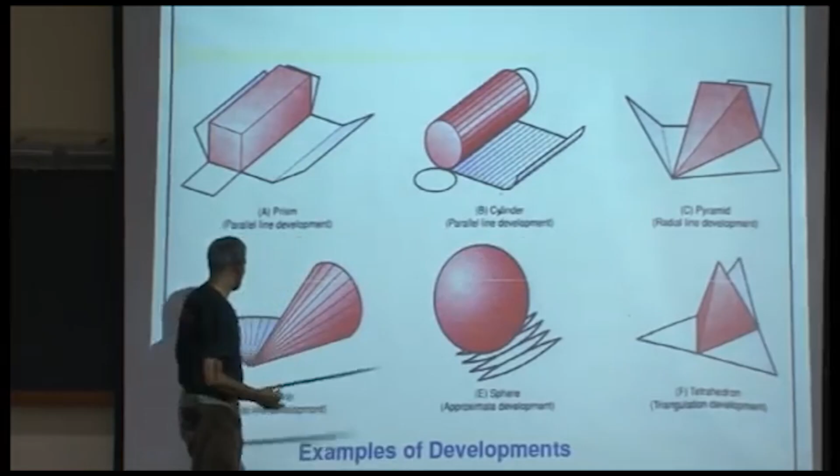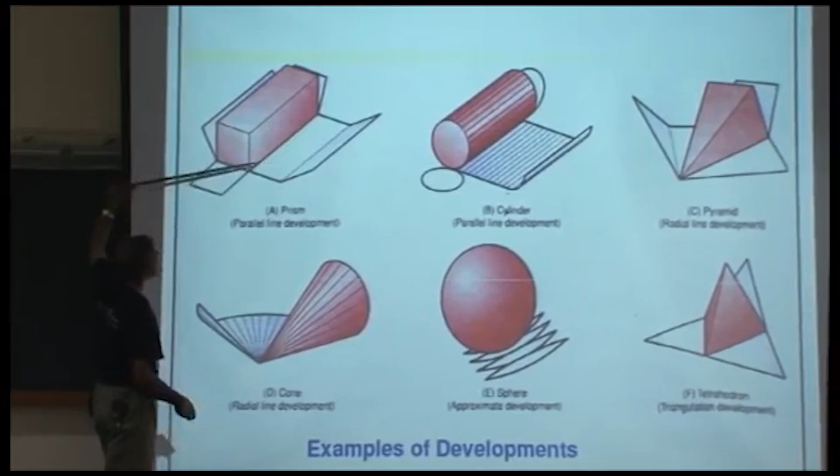So what you see is a box or a block, a cylinder, a pyramid, a cone, a sphere, and well, this is a tetrahedron. This is pretty much like a pyramid. Okay, and what you also see is that they may have been made by paper. And how would you want to unfold the paper so that you can lay it down flat on a plane? So perhaps you can cut one of the edges. You can make one cut over here, another cut over here, open up and lay it down on a plane, and once you fold them back, you would get this cuboid, for example.

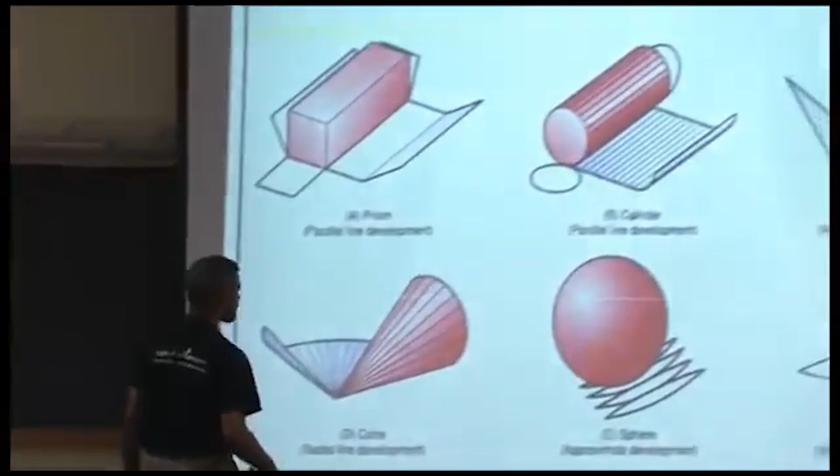Same thing with the cylinder. So cut this face apart, and make a cut along this direction, lay it down. So essentially the idea is that all of these solids, except for perhaps the sphere, have been made by a single piece of paper. And the question again is, how would you want to prepare that piece of paper so that you can get the solids back? All right, so this is quite straightforward. The unfolding is quite straightforward.

So the method is the parallel line development: cut and lay it open. Parallel line development; this is pretty much like a radial line development, for example, when you cut the pyramid, you open up, so to speak, a sector. Not a rectangular piece of paper, but a sector. Same goes with the cone, and with the tetrahedron, you open up this piece of paper into triangles.

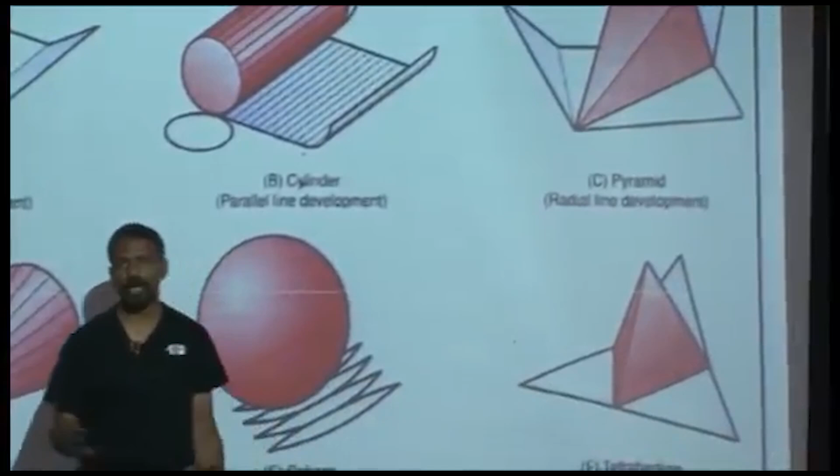So just an example. Examples 1, 2, 3, 4, and 6 happen to be examples where you prepare your piece of paper in such a way that you get the exact solid back. This one is like an approximate example. We'll talk about that. So certain developments are exact, certain developments are approximate. Except for this example, all the other developments are exact. This one is approximate, and this point seems to be important.

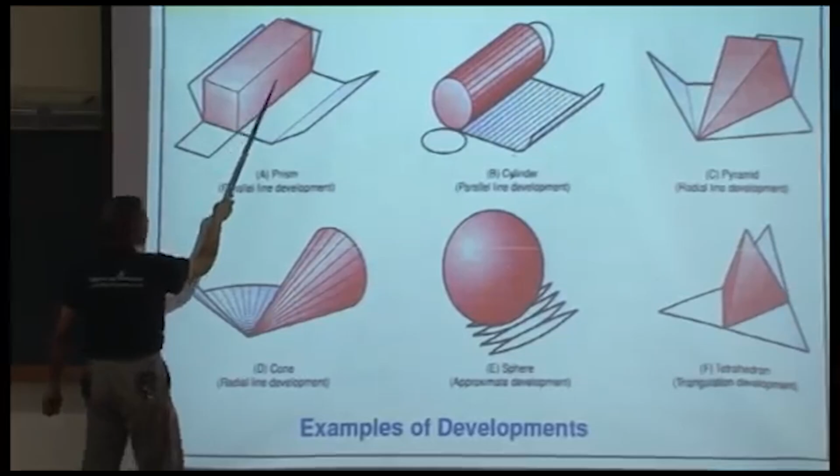So for example, if you have a little void here on the surface, or a void here, or any feature, when you are opening up that corresponding piece of paper, what do you expect? Should the feature be in true dimensions, or in some sort of untrue dimensions, or projected dimensions? What do you expect? True dimensions? Everybody? This is what the intent is. All features on these surfaces have to be in the true dimension, and that is the point you have to keep in mind when developing a solid or a surface. True lengths or true shapes.

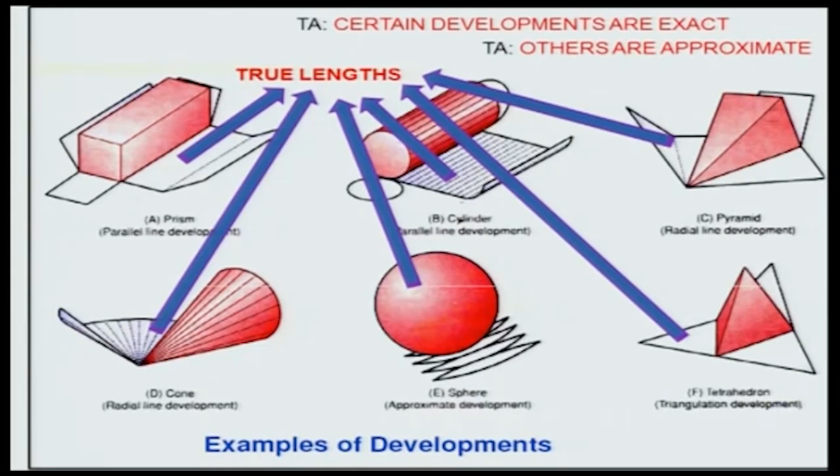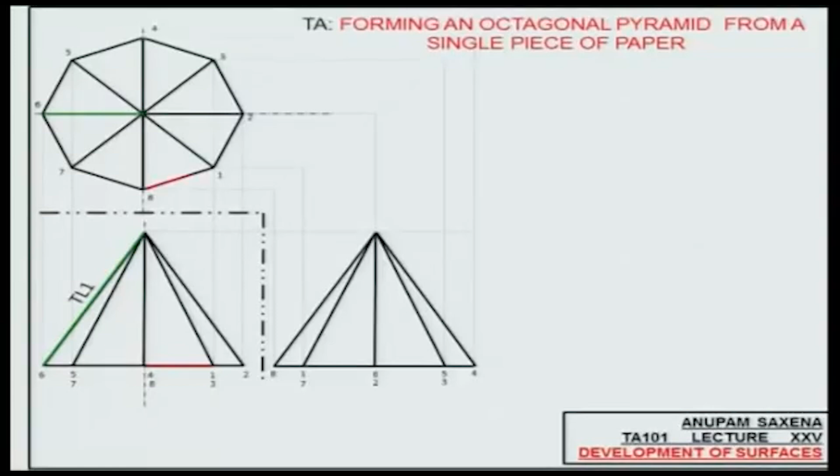Look at this projection over here in red, and look at the corresponding projection in the top view. Is this projection in true length? Again, the same principle. This projection here is parallel to the hinge line in this view, and therefore this one should be in true length. So I'll call it TL2. The entire thing you have to keep in mind is to keep figuring out the true lengths.

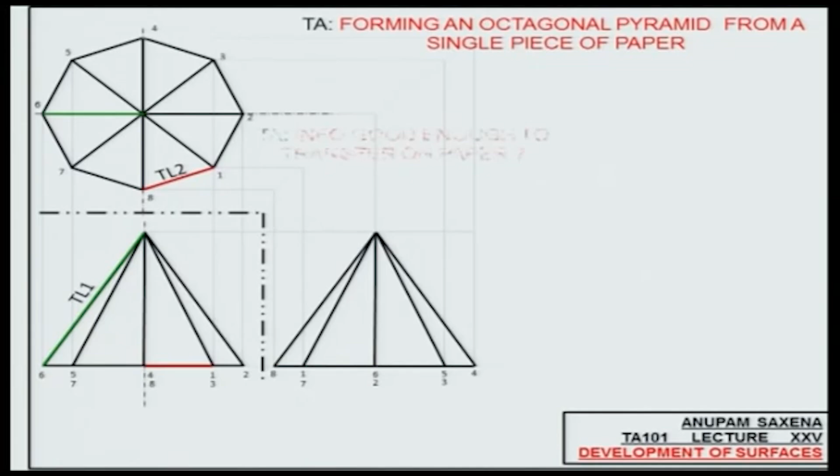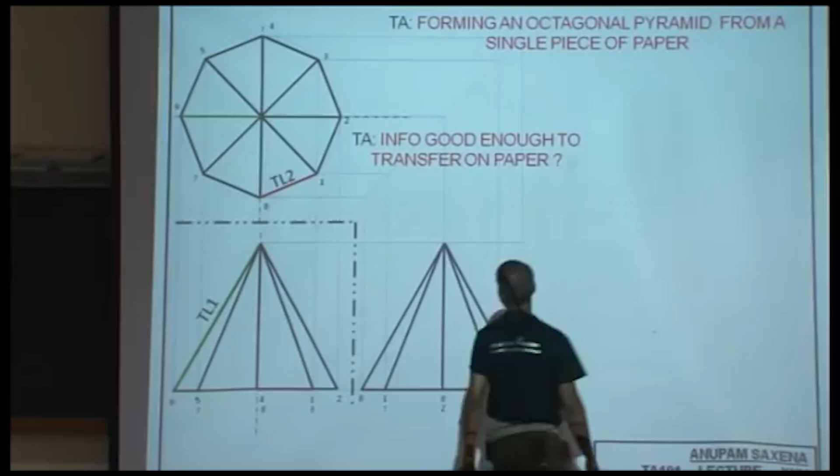Is this information good enough for you to work with a paper on a plane? Is it good enough for you to transfer the entire information that this solid has on a single piece of paper? Yes? All right, let's see.

So you have this true length, TL1. Taking one of the ends of TL1 as the center and the radius as TL1, draw an arc. And taking TL2 as the dimension with this vertex as center, cut the previous arc with a new arc. And keep cutting these arcs. How many times are you going to be cutting? Huh? 8 or 9?

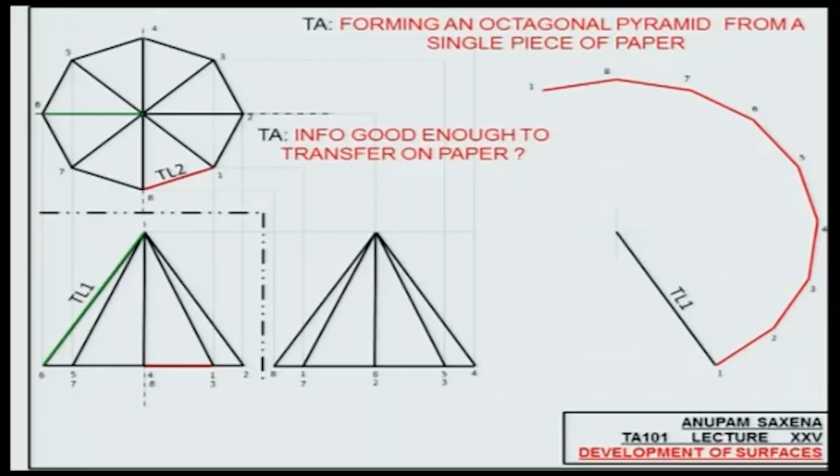Keep cutting. And all these lengths, they are going to be what? TL2. Okay? So there have to be how many cuts? So 1, 2, 3, 4, 5, 6, 7, 8, corresponding to the number of vertices that you see in the top view there. And of course, join these points with the center.

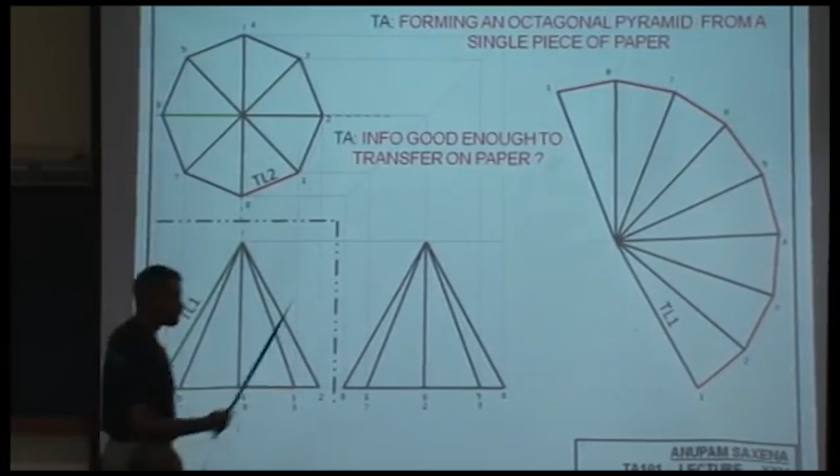So what you have is something very simple. If you make this sector out of a paper and fold it at these, so to speak, lines, you'll get this solid back. Right? Pretty simple.

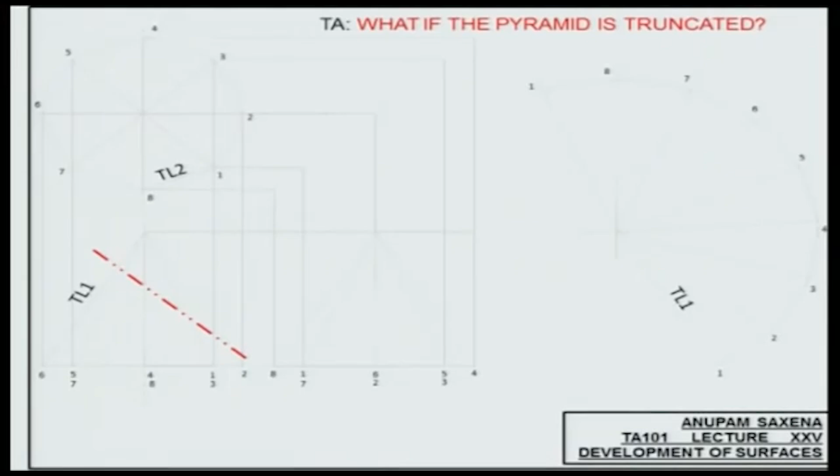Let's make our lives a little more complicated. What if the pyramid is truncated? What if I have a plane that is cutting the pyramid? Then what? The base will be the same, so we'll have to be working with this entire picture over here. Just that we have to be a little worried about the intersection points between the octagonal pyramid and this plane. So let's try to figure the intersection points first.

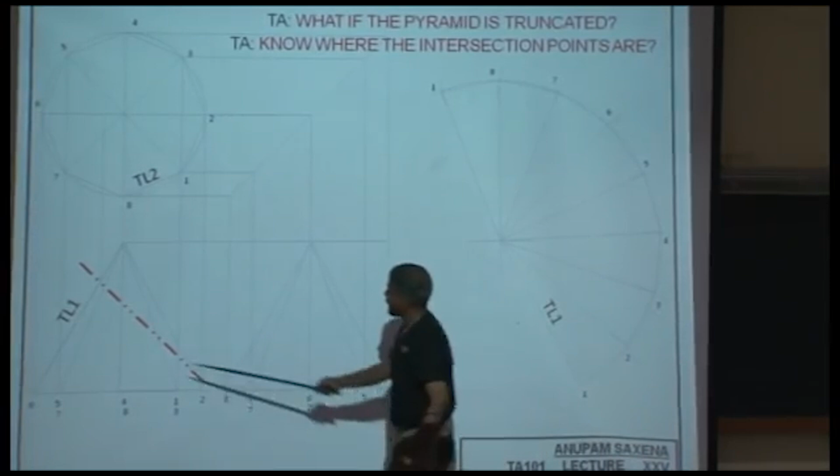You need to know where the intersection points are. Where are the intersection points going to be lying? Well, you have these edges, right? So the intersection points, they have to be lying on this plane, and they also have to be lying on these corresponding edges. All you need to do is project those intersection points in the top view and the right side view. All right, so keep projecting.

So this one lies on edge number 6. This one lies on edge number 5. So keep projecting, and you essentially will be figuring out these intersection points in the top view. All except for 2 of them. Those intersection points which will be lying on the vertical edge over here, number 8, and the edge behind it, number 4. So number 8, which is facing you, and number 4, which is behind this.

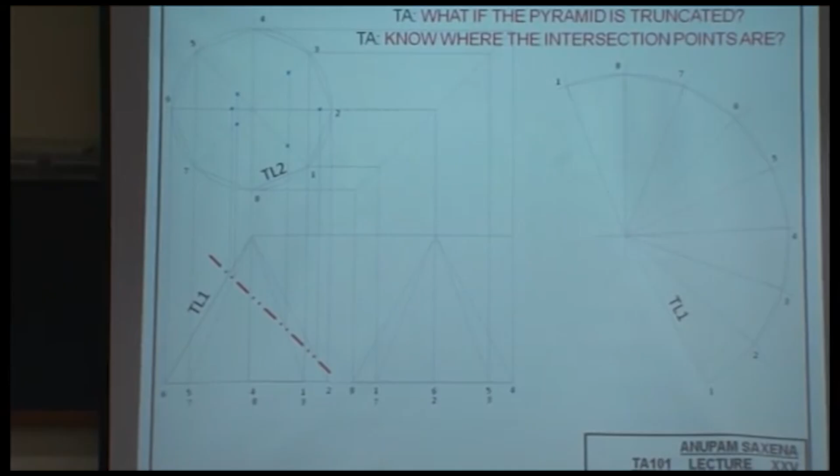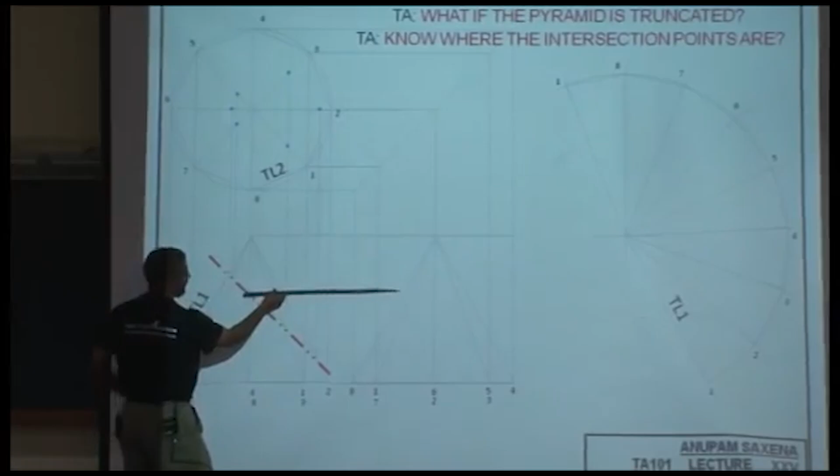How do you figure those points of intersection? You can make this projection, perhaps. So if you can make this projection, this is number 8, this is number 4. You'll be getting the corresponding intersection point over here and over here. Project them backwards onto the top view and get those intersection points.

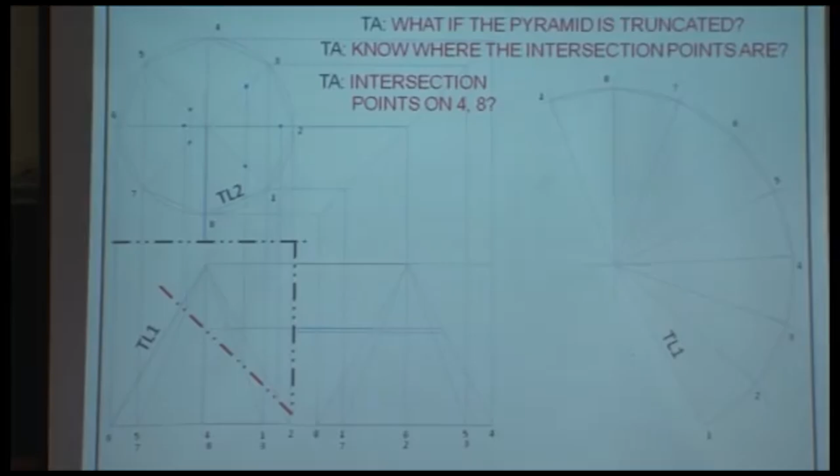So you can directly project those intersection points from the profile view and transfer them onto the front view. So these are your intersection points. I'm not labeling them, so labeling is something that you'll have to do later. And join those intersection points to get this contour.

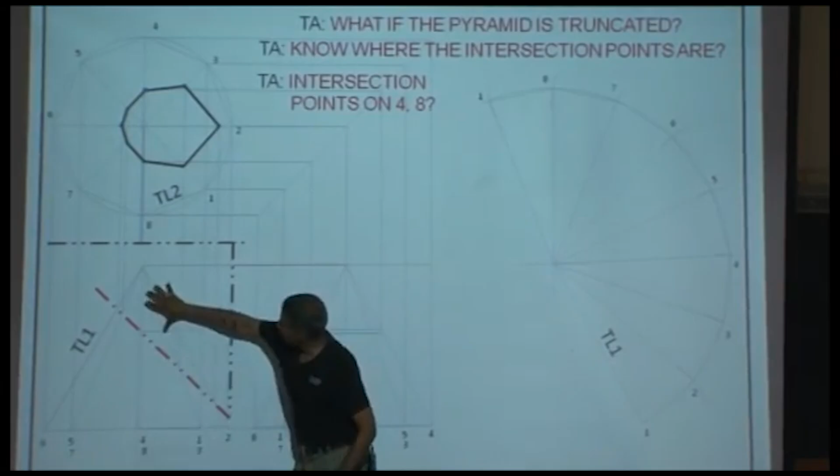Now, when I say that the pyramid is truncated, I essentially mean that this part of this pyramid is taken off and it's replaced by a plane covering the top portion of the pyramid. So this is the top lid of this pyramid. What's the bottom lid? The octagonal face, no? 1, 2, 3, 4, 5, 6, 7, 8, the octagonal face. All right.

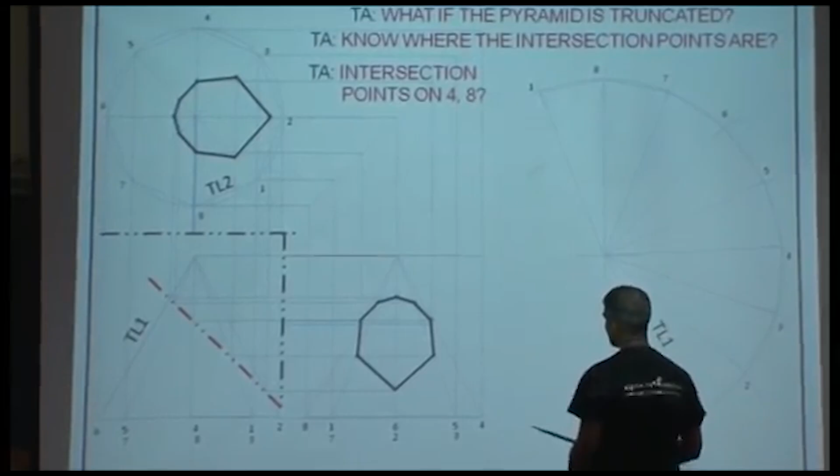So you can as well project these intersection points onto the profile view, get them on the respective edges of the octagonal pyramid and complete the contour. Is this contour in true shape? What did I say? If you have to lay down those features on a plane, you have to get the corresponding things in the true shape, no? Well, so this is the actual truncated pyramid that you see.

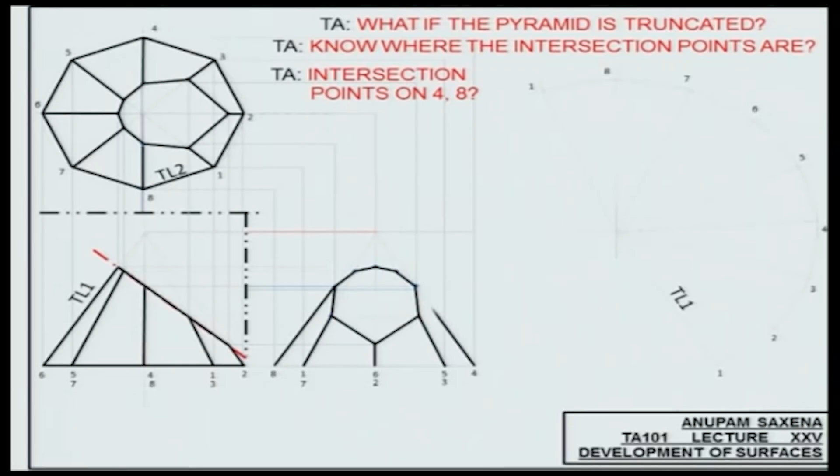The actual truncated pyramid that you would see. The top portion of the pyramid is gone. Okay, this is the top lid of the pyramid which is covered, so the pyramid is not open, and of course the bottom face of the pyramid is covered by that octagonal face.

All right. Always label the points. So I made a mistake of not labeling the points, but you should always be labeling these intersection points. Every point that you're working with in your intersection and development exercise, always label them. Okay, so now I am labeling those points. A, B, C, D, E. Correspondingly, A over here, there are two B's. A, B, C, D, E would go from here to here. A, B, C, D, E would come from here to here. All right, so always label your intersection points.

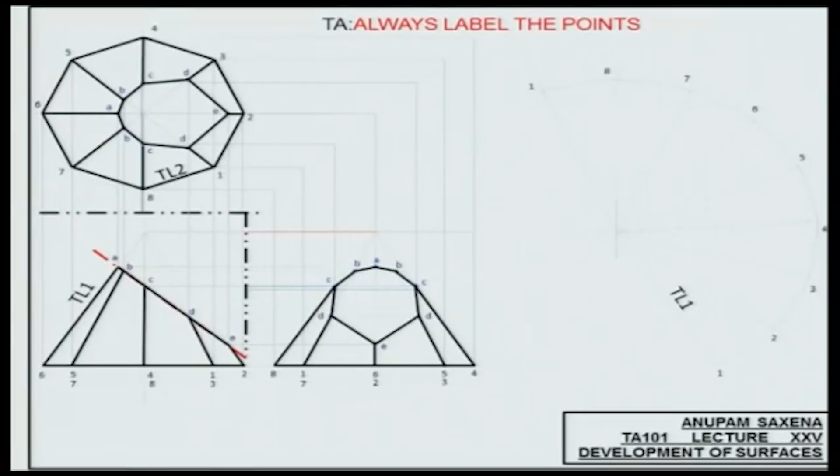All right, so I'm done pretty much. Now I need to get this contour in true shape. Okay. Well, yeah, so something that I already told you, it always has to be the true lengths and true shapes that need to be transferred onto the piece of paper. Okay, and we need to find them as a part of the exercise and development. All right.

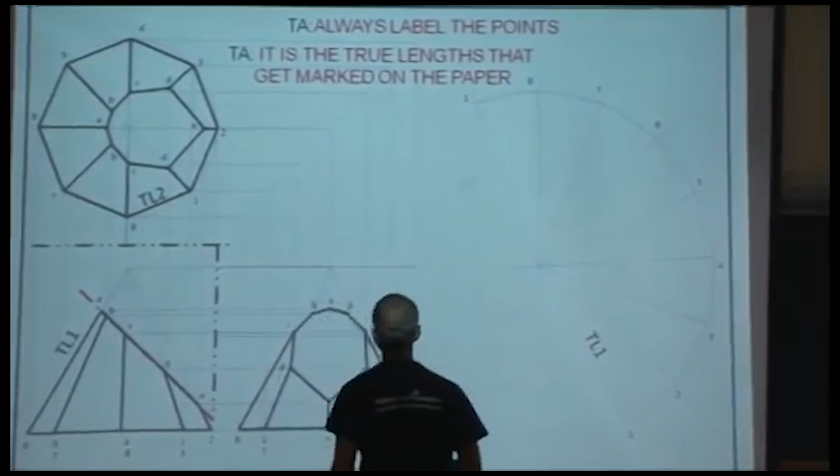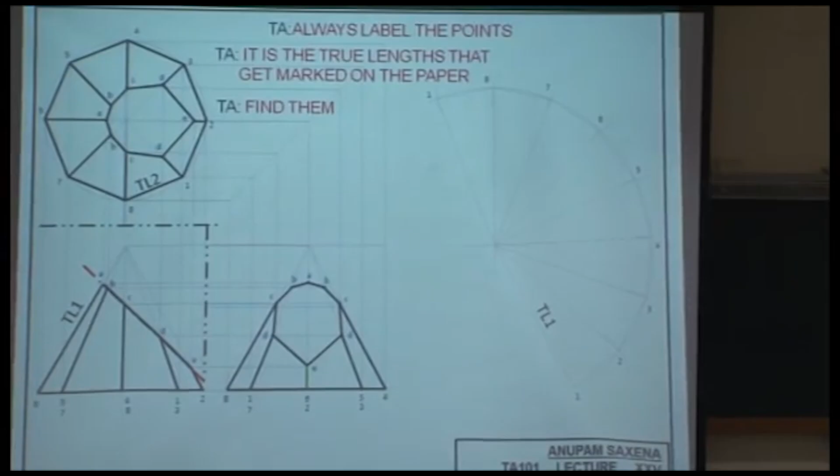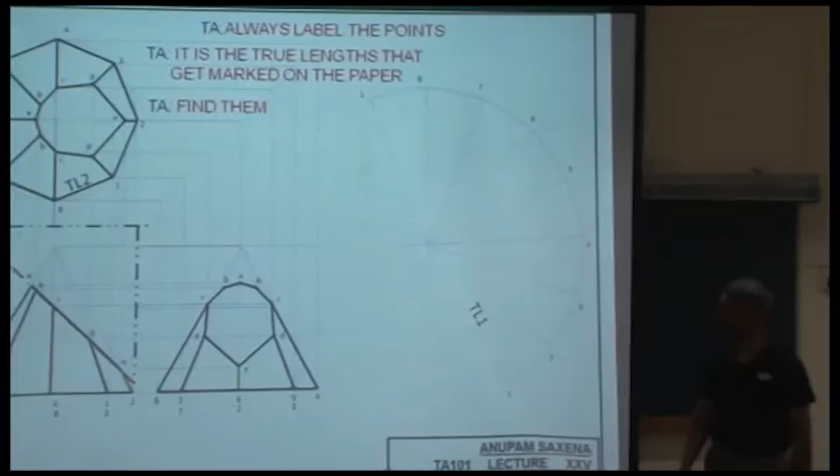Now, let's worry about this lid later. Let's worry about the rest of the edges. Look at this edge. This edge would lie on which edge of the octagonal pyramid? 6 or 2? What's the corresponding projection in the front view? This one? Okay, so this is edge number 2. Is this in true length? Okay, so if this is in true length, it should be possible for you to transfer that length over here. There. Is there any 2 that you're seeing here? No? That's fine.

How about this entire thing? This is on which edge? Number 6. The corresponding projection here is this, in true length. You need to transfer that onto edge number 6 there. Okay? So the intersection point over here would be A and the intersection point over here would be E. Always label. Yeah? All right.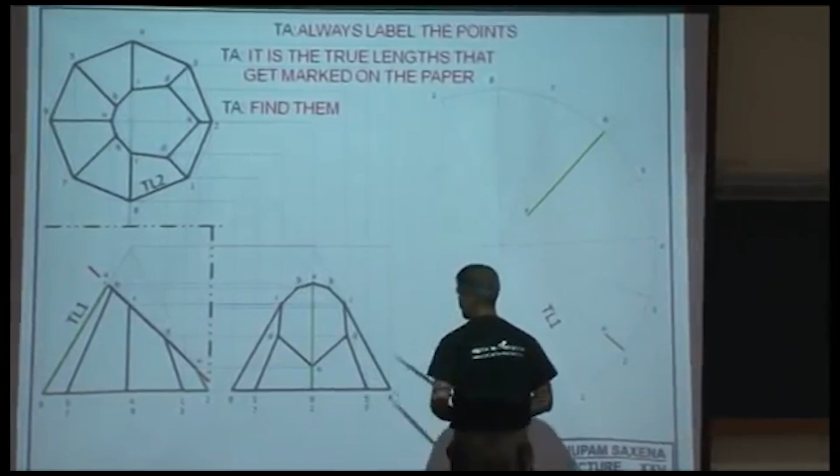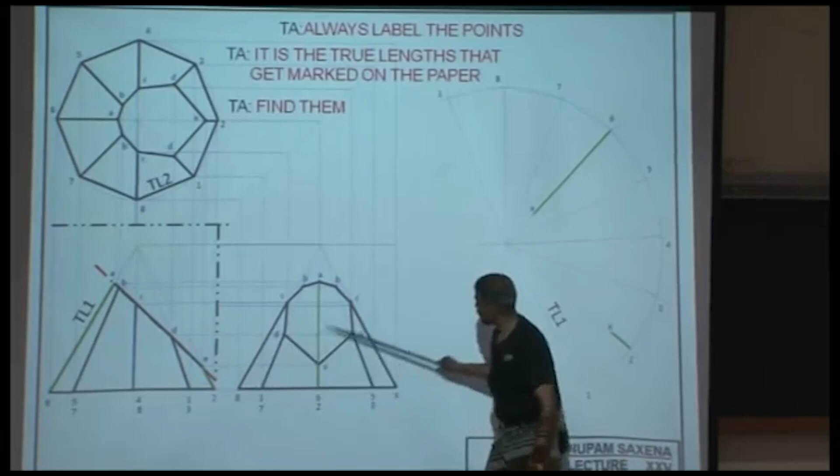Let's look at this edge. Okay? Intersection point C. All right, so where is it? Can you identify the corresponding projection in the profile view? C would be on 8. And it would also be on 4. So 4 and 8. Yeah? Is this in true length? All right, so it should be on 8. Is this also in true length? Great, so it should be on 4.

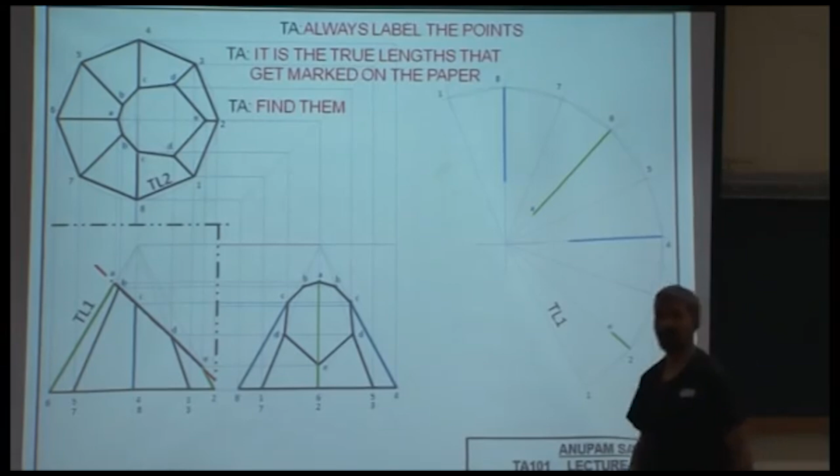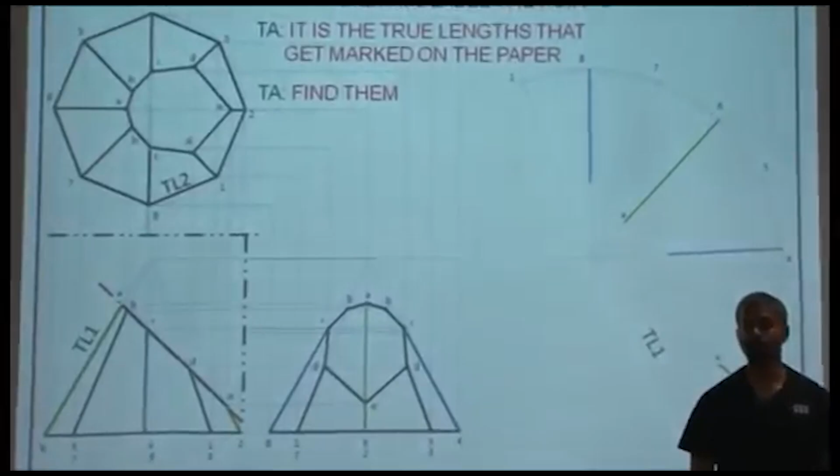Wonderful. How about the lengths on edges number 1, 7, 5 and 3? So 5, 7 are here. 1, 3 are here. So if you're looking at the corresponding edge over here and its projection there, this is slant and so is this. So is it possible for you to extract the true dimensions directly from these two or from the information given? Huh? It is possible. No algebra, no fractions, just geometry. No root 2, root 3, root 4, root 5. No pi, just geometry.

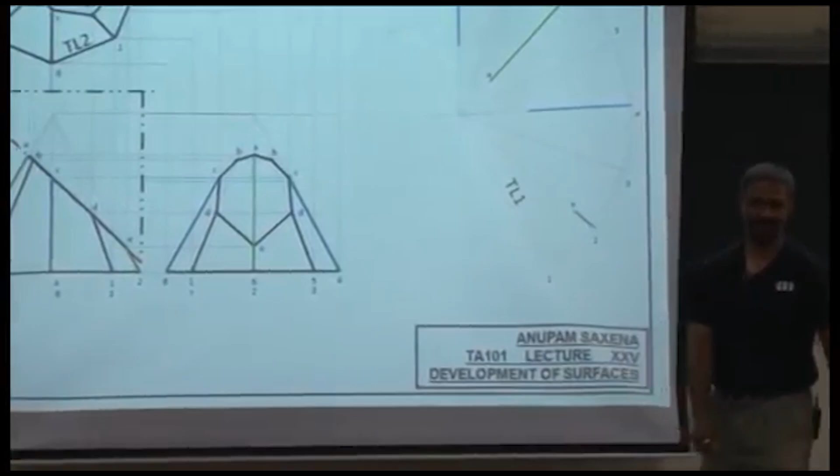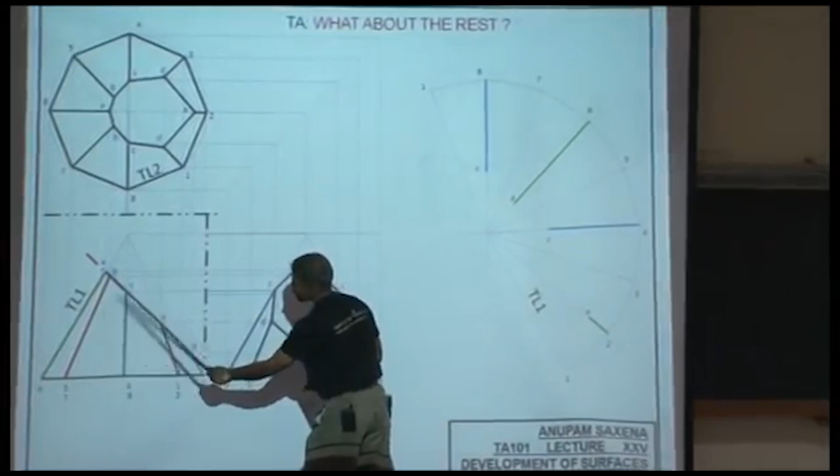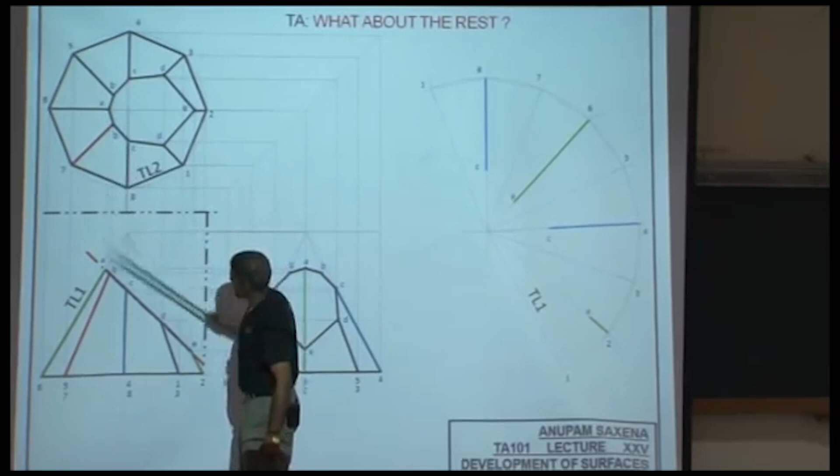So we can project B onto the... Yeah, I'll come there. I'll come there. All right. So these are intersection points C. Okay. All right. What about the rest? We are trying to address that. Okay, so look at this projection and try to figure the corresponding projection in the top view. Okay, B7. B7 is this one. B5 is this one. Yeah?

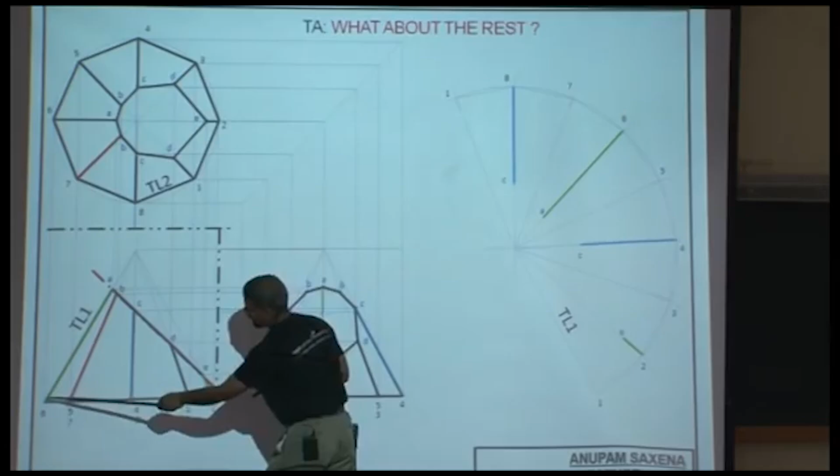I'll do a little trick. So what I'll do is I'll displace the line in both views. I'll displace the line in such a way that one of the vertices of this line, the true line, lies on vertex number 6. You follow that? Just rigid body displacement. I have kept the lengths of these corresponding projections the same, just rigid body displacement.

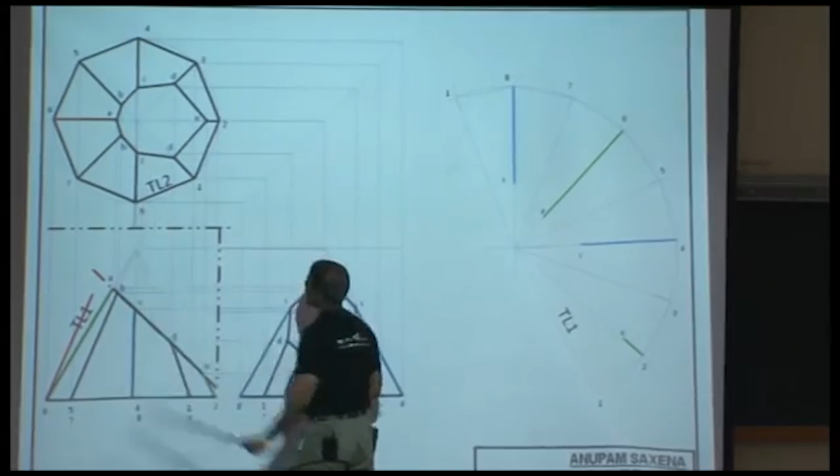And just in case if you remember the method of rotation to figure out the true length, precisely if you do that, if you rotate this, then what will happen to this projection? You take a projection from this point here down, okay? This height would remain the same, and eventually this guy would come here. Just using the method of rotation.

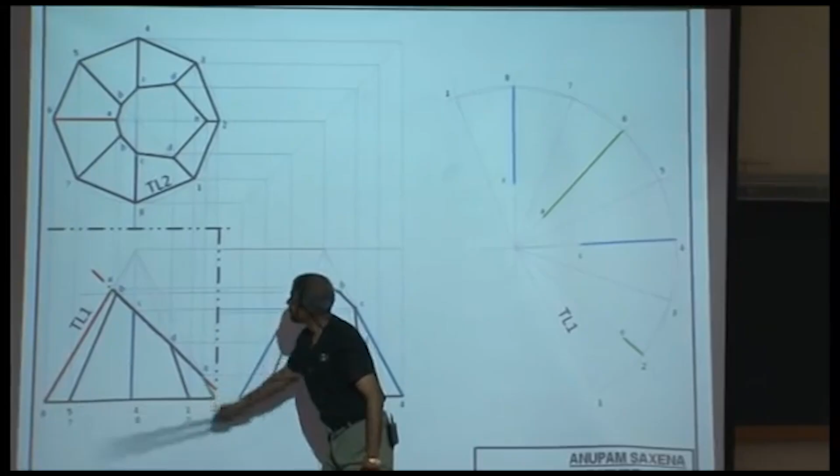Yeah? So let me go back. So you have identified these projections, made rigid body displacement, shifted the line such that one of the vertices of the line lies on edge number 6. Followed the method of rotation. When you do that, this guy gets rotated to lie on the slant surface. Yeah? Now you have the true length. You have the true length for what? This guy here, B7 and B5 as well. Yeah? Take that true length and perhaps transfer it there.

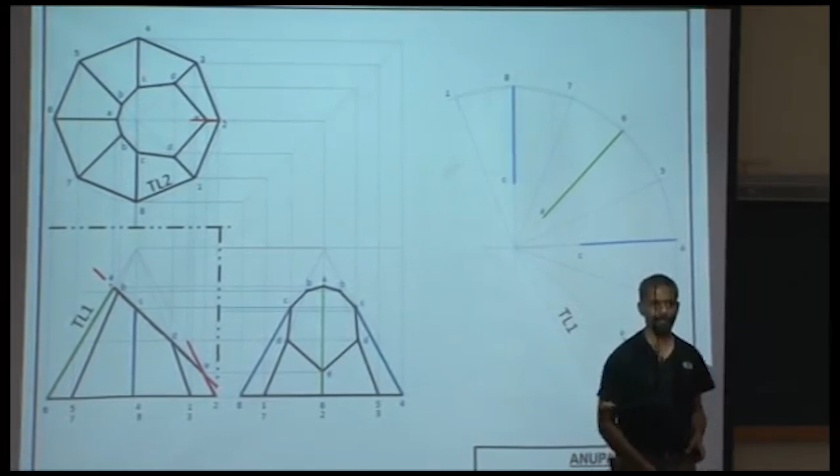Okay, likewise, I can do the same thing for this. Identify this projection, the corresponding projection is 1D, and on top it's 3D, not 3 dimensions but 3D. Okay, shift, follow the method of rotation. This guy gets rotated to lie on this slant edge. Yeah?

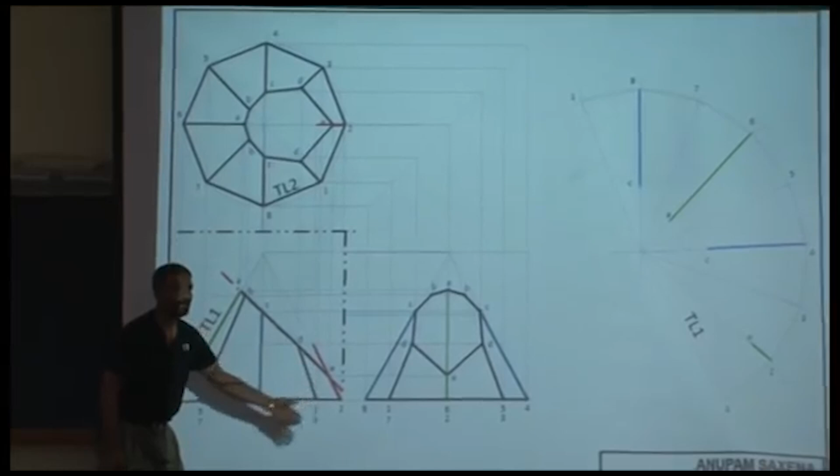This is just for you to understand. One method that I'm going to be talking about now is going to be much simpler. So what you realize is whatever length you have here, if you just project them in such a way that they all happen to be on the slant edge of this pyramid, essentially you're going to be getting the true lengths over here. Okay, this is where I'm coming to.

Realize that to get the true lengths, you need to project the intersection points onto the extreme right or left edge of this solid. Yeah? So this point is lying on this edge. This point projected over here. From here to here, you'll get the true length. This point, again, projected onto the extreme left, get the true length. Likewise for D, and point E is already there.

Right? So if you project all these intersection points so that they lie either on this edge or this edge, the corresponding lengths, they'll all be in true length. That's a much simpler method. So these are the corresponding projections, either on the left or on the right. So once you have these projections, transfer them onto that piece of paper, draw the radii or draw the arcs if you want to. You don't have to, but if you want to, draw complete arcs.

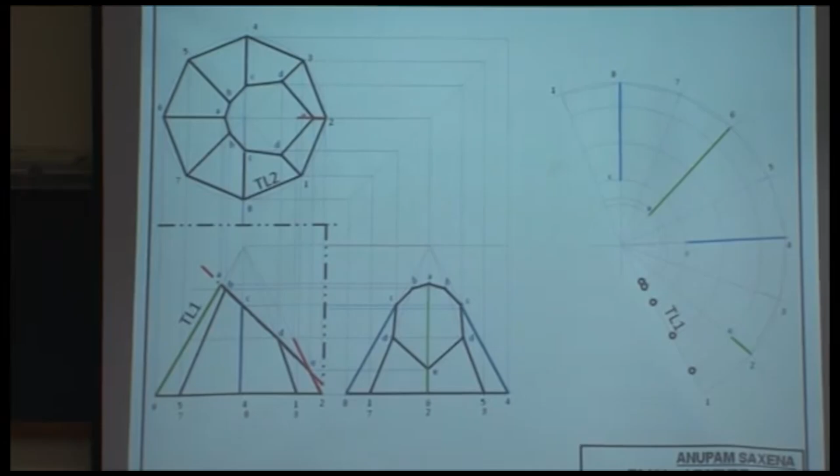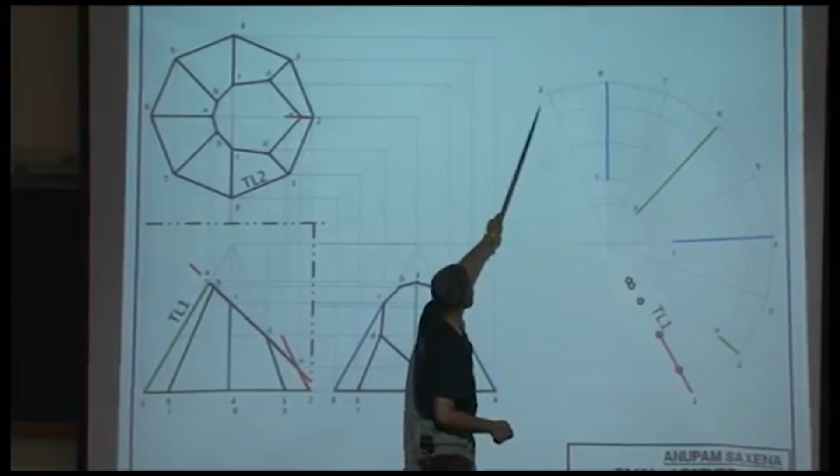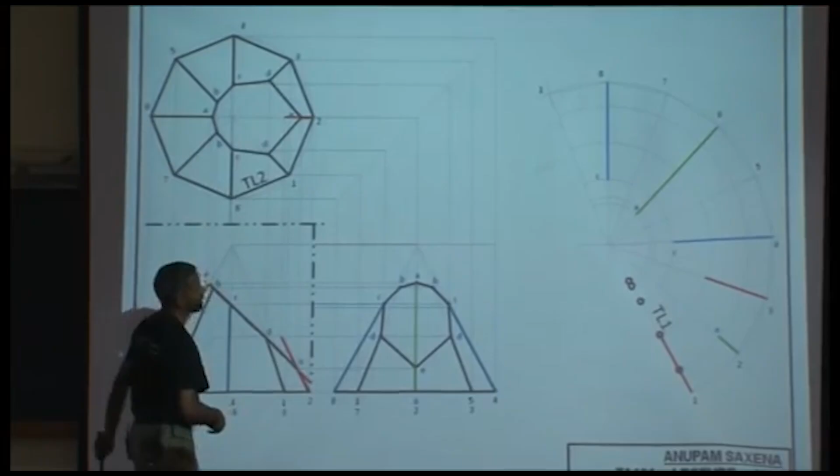But what is of interest to us are these edges, edge number 1, number 7, number 5 and number 3. This is where we want the true lengths to be. Alright, so let's work with edge number 1. This length is what? This length is this point getting projected over here, so it's this length. It's on edge number 1. So one here and the other one here. And so is the case with edge number 3 also. So this is 1 and this is 3. So these lengths get transferred.

How about number 5 and number 7? B projected over here. So it's this point here now. Alright, so of course label, and this is the true length on edge number 5 and this is true length on edge number 7. Same. Are you with me? All of you?

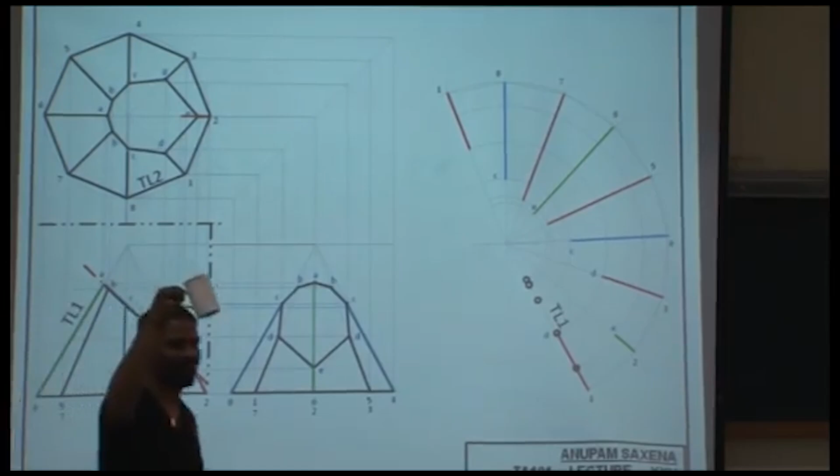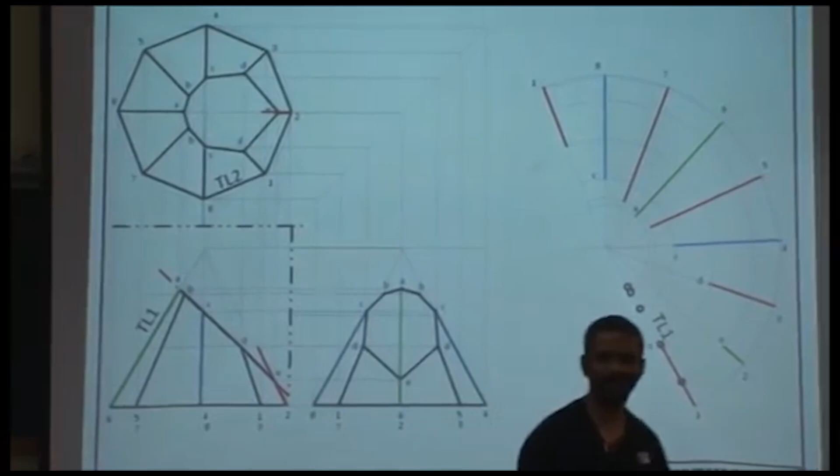By the way, my teacup, how many of you think that this is actually a torus? A torus. This is actually a torus. Is that true or not? Have you ever played ring? That ring is a torus. Do you remember playing ring when you were kids or even now? That's a torus. So this cup is actually that ring. Do you believe me? You don't believe me? Louder. Do you believe me? All right. But that's true. This is actually a torus. Anyhow.

You know, there's something called topology. Topology, science of connectivity or discipline of connectivity. So you learn theory about connectivity in there. So many of the guys in electrical and computer science, they'll be learning about networking. Network, that's connectivity in a way. So in your third year, in your fourth year, when you learn about topology, when you learn about homeomorphism, that is where you'll actually figure that this is a torus. Okay, but that's too late for you. At this time, it's engineering drawing.

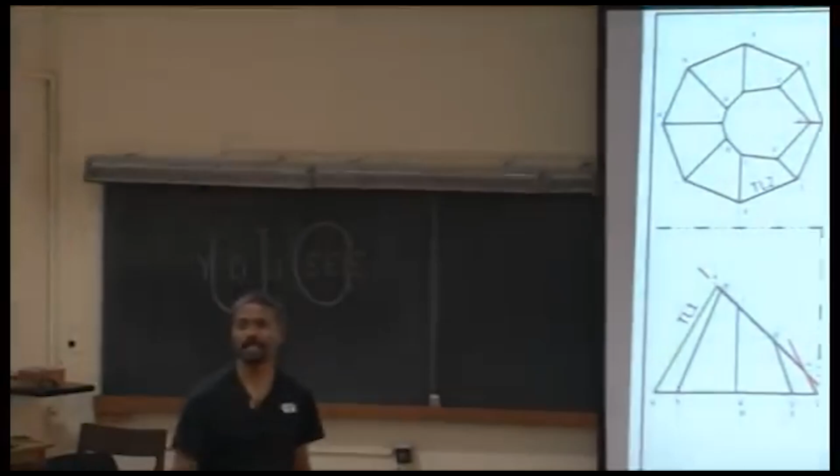So, all right. So once you have transferred all those true lengths on the respective edges and labeled the intersection points properly, I'll make a little change. I'll change the color of these lines, and also I'll change the representation of these lines. Instead of denoting these lines as solid lines, I'm denoting them using hinge lines. Why? Because those are the locations where I am creating folds. Okay?

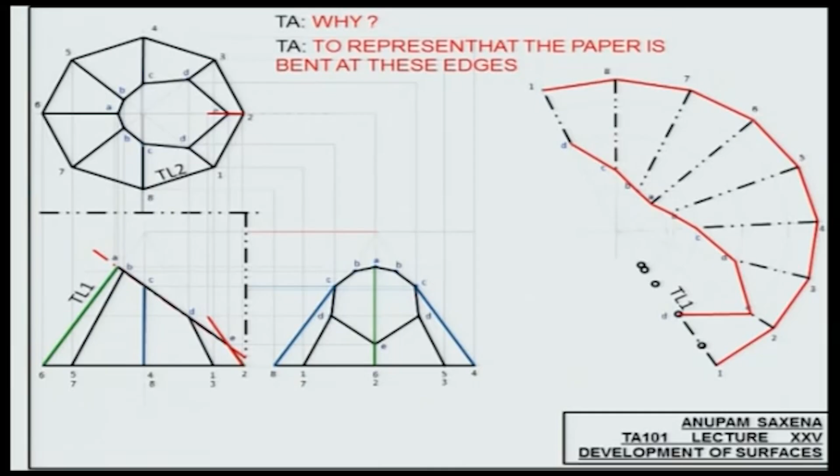Those are the locations where I'm creating folds to get this solid back, to represent that the paper is bent or folded at these edges. And then, of course, close the contours. So if you take a piece of paper, cut it in this fashion, fold it at the respective locations that are denoted over there, you'll get that solid back. With the difference, the bottom plane and the top lid, they will not be there. So it's going to be an open, truncated pyramid. Okay, let's work on that.

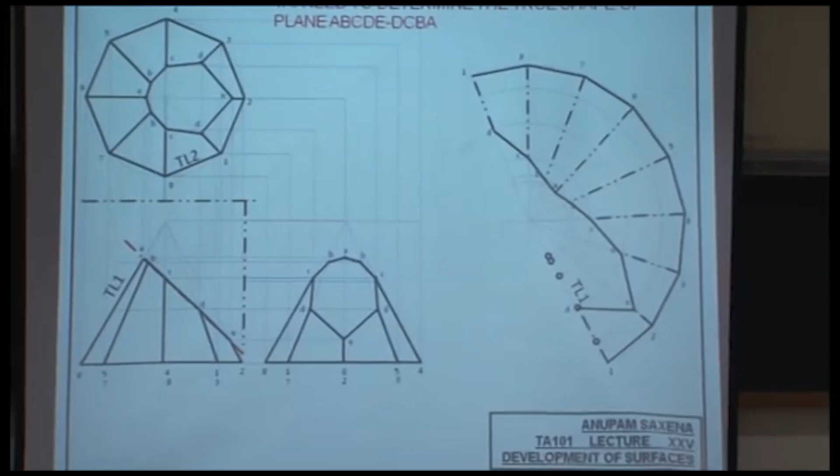Again, you're going to be working with graphite pencils, so your drawing is going to be gray, not colorful. To get the top lid, once again, if I may remind you, you have to get true features and transfer them onto the paper plane. So you need to determine the true shape of plane A, B, C, D, E, D, C, B, A. So this plane right here.

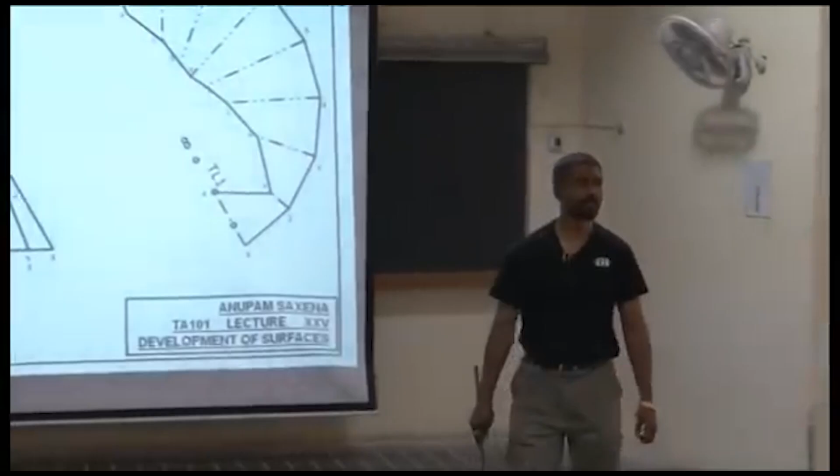Do you know how to get the true shape of a plane? Do you see the edge view of this plane? Which view is it in? Front view, all right. Draw a hinge line. Shoot projectors perpendicular to that hinge line. Transfer distances. You know that, so I'm not going to be going through it once again. Okay.

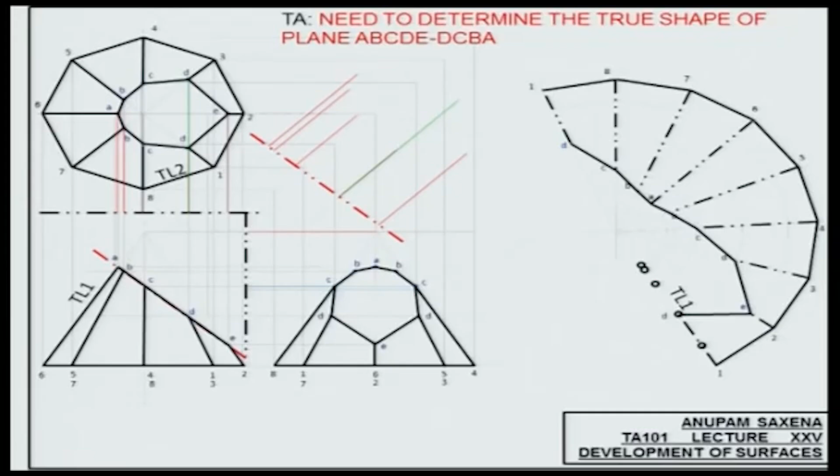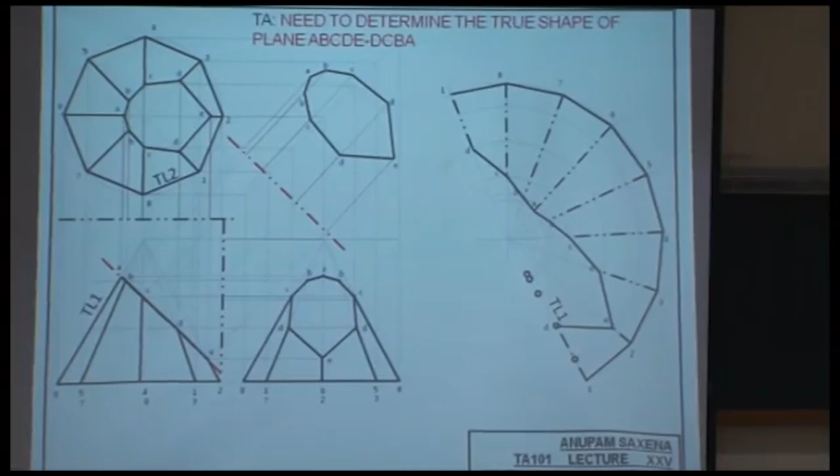Transfer distances, and then get the true shape of that top lid. Okay. All right. So where is this lid going to be? Of course, you have to label these points also. So where is this lid going to be? Somewhere over here or somewhere over there? Huh? Well, it's going to be somewhere over here, no? Yeah? Let's worry about that in a while.

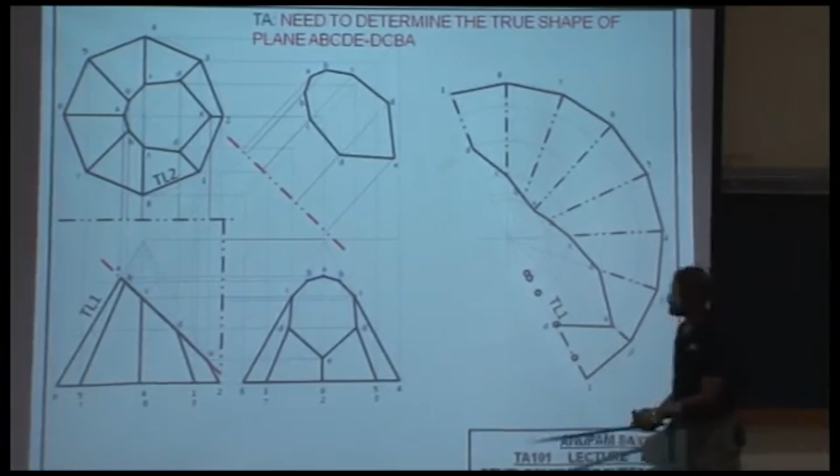All right, so by convention, this is what we do. We start developing the surface in such a way that we start with the shortest edge on the surface. So if you look at these edges, and if you figure out the lengths of these edges, you will find that this would be the shortest in length, and you start with that. So the edge you start with, you have to end with the same edge, because you have to glue the corresponding edges.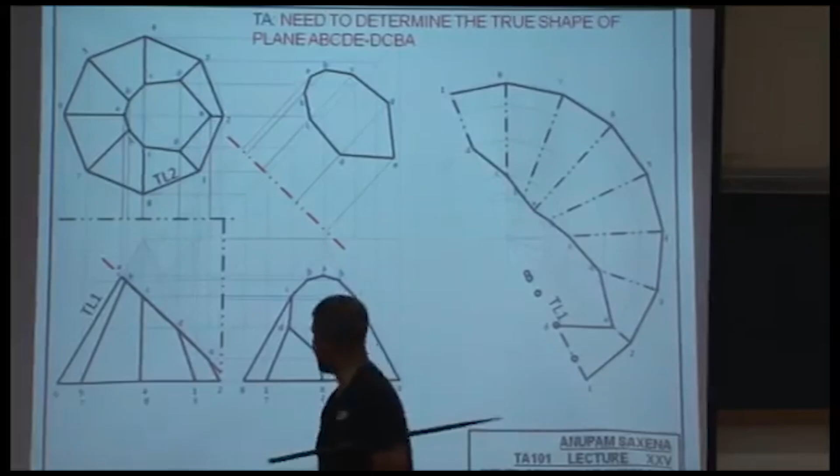Yeah? So this is what I have done. So instead of starting with edge number 1, I figured that edge number 2E was the smallest. So I started and ended with edge number 2E. Okay? Conventionally, start development with the smallest edge and end with the same.

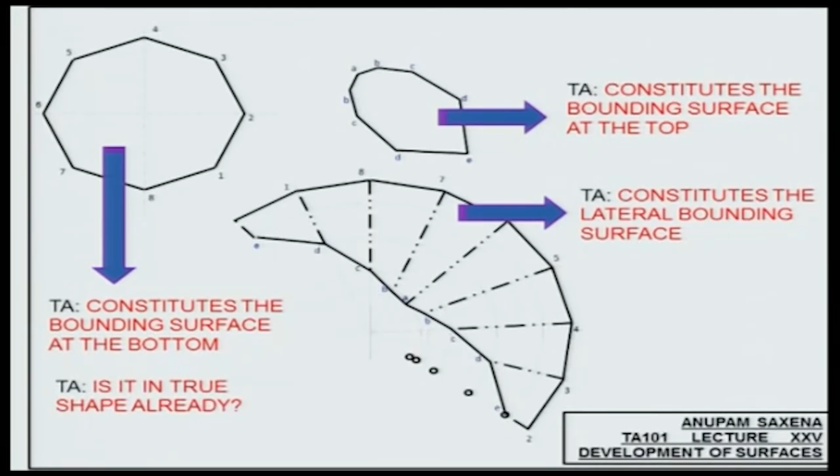Alright, so rest of the information is taken away. What is important is the lateral surface of the solid, the top lid of the solid, and the bottom face of the solid. Okay? This one constitutes the lateral bounding surface of the solid, the top bounding surface of the top lid, the bottom face. Okay? That's of course in true shape.

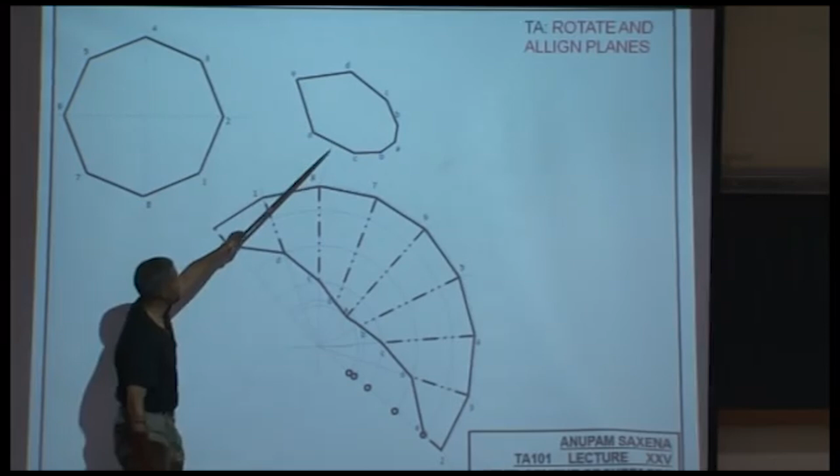What you need to do is rotate these guys, and align them appropriately onto the main developed thing. So notice where I am aligning this face over here. So notice AB, and looks like I am aligning the two ABs together. Right? Likewise, rotate the top face and align the corresponding edges appropriately. So I align one edge together. So I align this guy with this guy. Right?

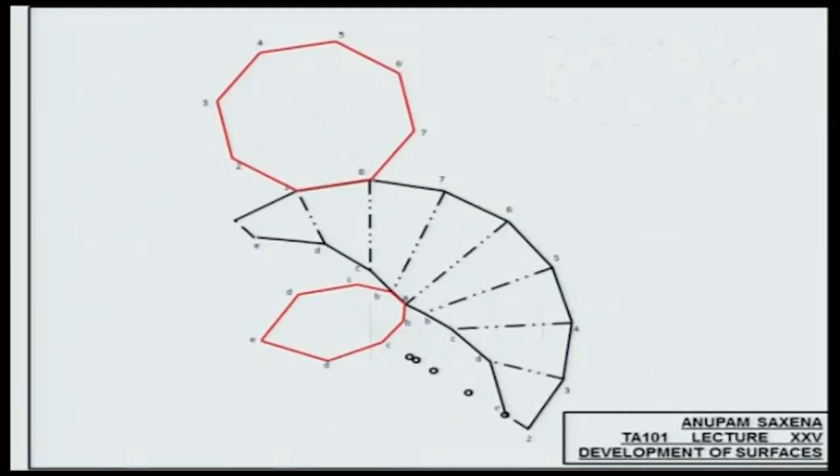Now that's a single cut that you need to make to get the entire solid back. Yeah? A single cut you need to make on a piece of paper to get the entire solid back. This is what development is. If you cut this paper, fold it and glue appropriately, you will get the bounded truncated pyramid back.

Is the location of these two planes important? Are the locations of these two lids important? These two faces important? Can you locate them anywhere? Theoretically, can you locate them anywhere? Would the location of the top and bottom bounding surface make any difference? So for example, if I choose to locate the bottom face there and the top face here, should be okay.

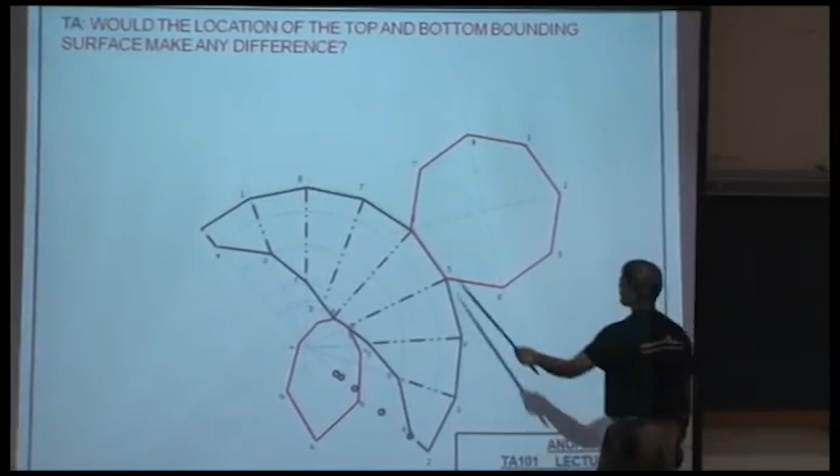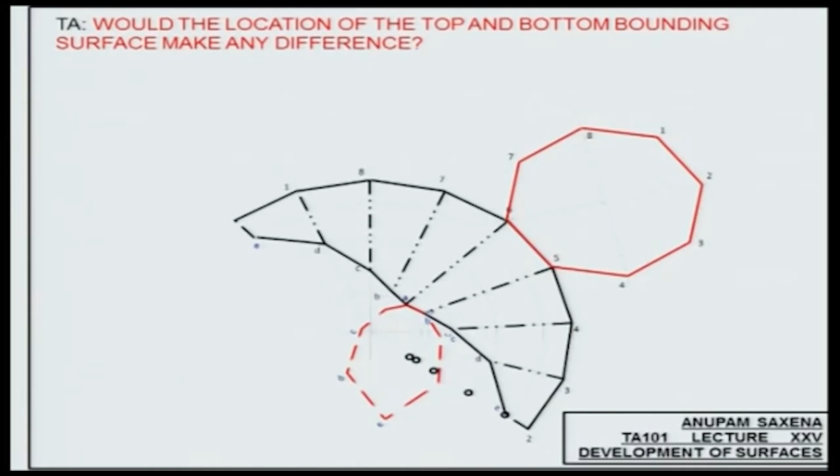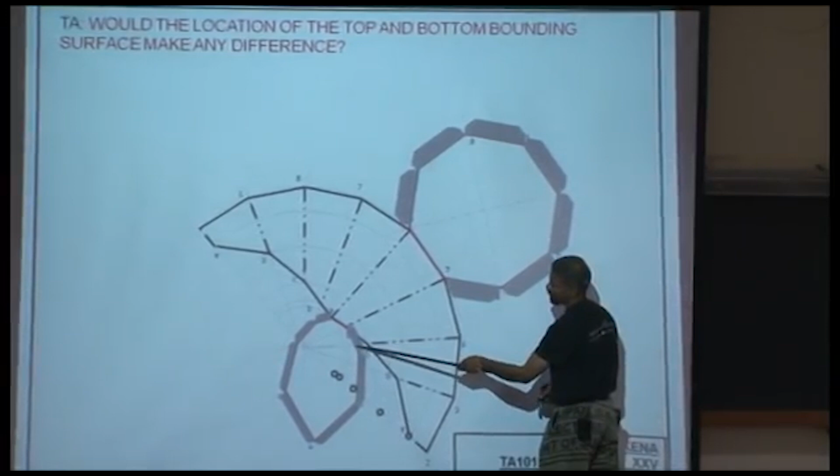Now figure what the problem is. Figure what the problem is. So if you allow for a little extension at this location, this is interfering with this laterally developed surface. Yeah? This location here. So you got to leave sufficient gap or space for the seams. So something that you'll probably want to keep in mind. Yeah?

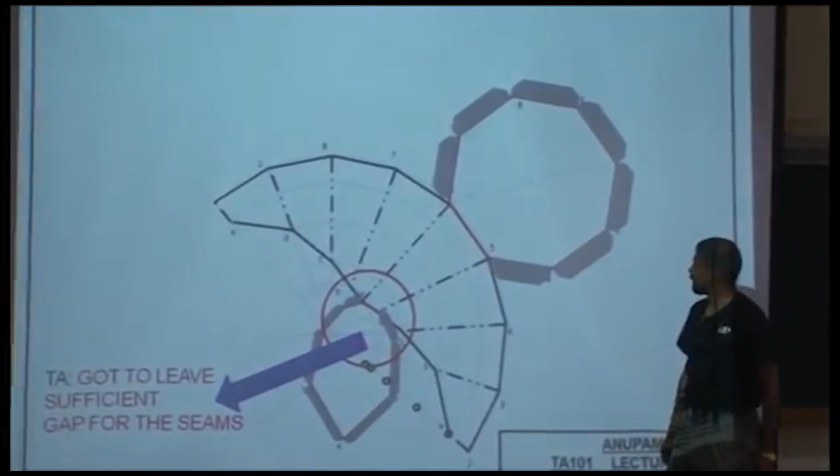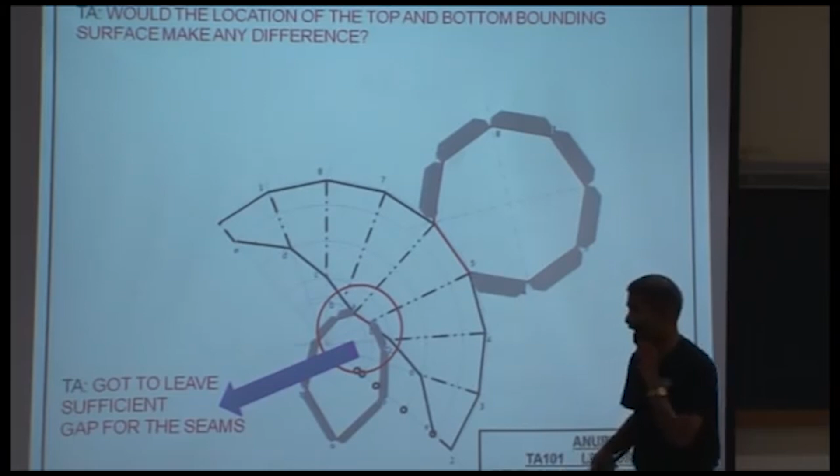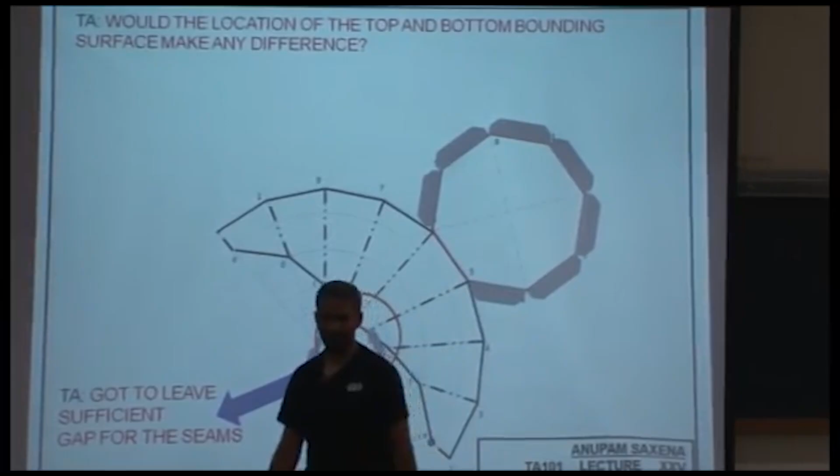Oh, you want to say that this is to be represented by? Well, technically, all right. So if I may repeat, what's the name? Shubham. So what Shubham is asking is whether this line is to be represented using the hinge line convention. With the same logic that, well, we are also making a fold here. All right, any other question?

Were you with me throughout? Were you with me throughout, out of the blue? Yeah? All right. Can I have my solids back? Can I have my solids back, please? Yeah?